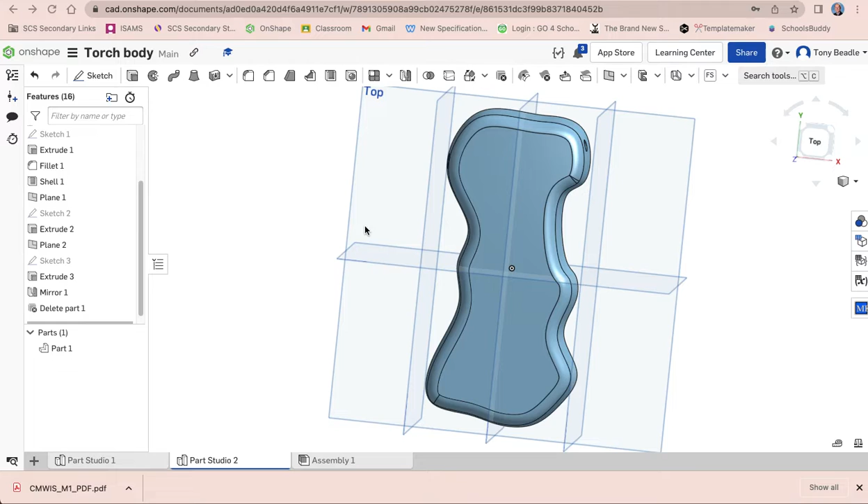Have a look at how you can make your torch body in Onshape. Here is a nice ergonomic shape that I've drawn in Onshape. It has holes for my switch and a hole for my LED, ready for me to either mill out or vacuum form once I've done the milling of the mould.

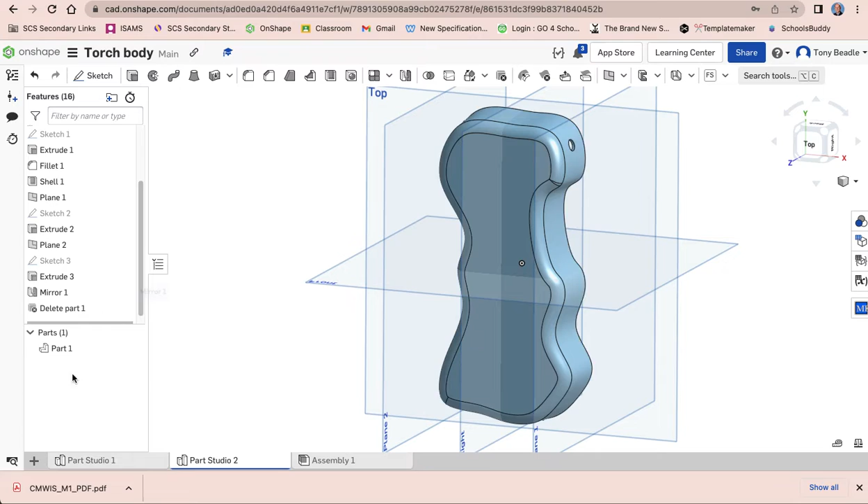Okay, so how do we start this off? Let's start off with a new Part Studio. So on the plus sign, create Part Studio. For you, it would probably be a new document.

I'm going to start by working on my top work plane. So I'm going to select that and then select New Sketch. I'm going to press N on my keyboard so I'm looking straight at it.

In order to draw out the shape correctly in the right space, I'm going to draw a construction rectangle first. So from the drop-down list, I'm going to choose my center point rectangle, not the corner rectangle, but the center point rectangle, okay, there.

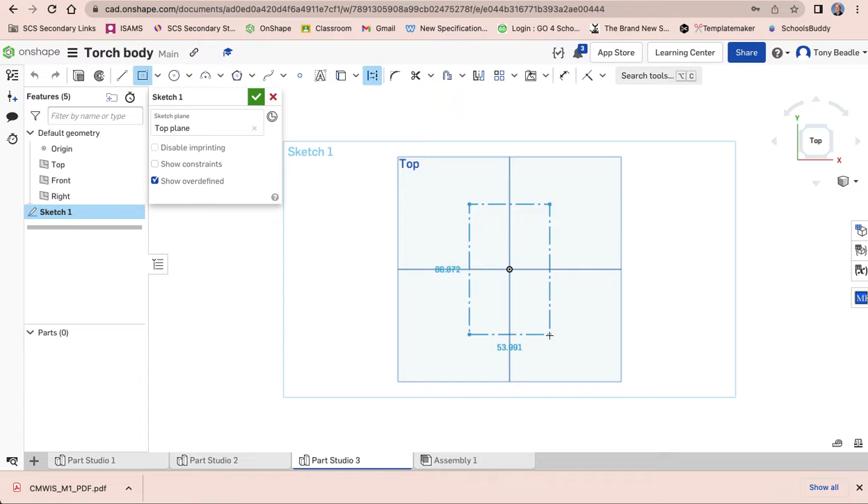And I'm also going to switch on my construction lines there. So these two are both selected. Then starting from the center, I'm going to drag out a frame. Now you can see here the lines are dotted, which is what I want. I want these as construction lines.

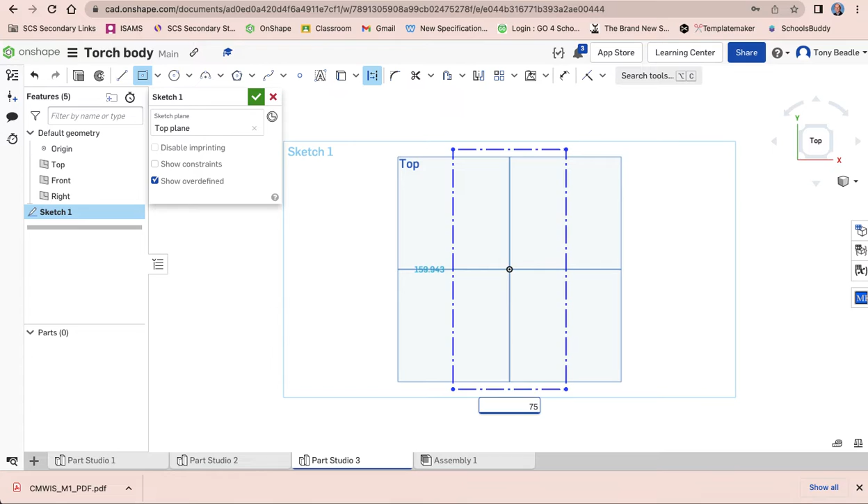Now the size of your block is 75mm by 150mm. Okay, so I've got nearly 75 by 150 there, so I'm going to click that. The white box has highlighted here. Remember, you don't click on that, you just type in the value that you want. So 75, press enter, it moves to the next box, 150, press enter, and there we have the size of the block that you're going to be using to cut your design out of.

Right, I'm going to use my spline tool for the next part. Make sure your construction line is turned off. So we're just on the spline tool. And now I know that I've got to fit it within this space.

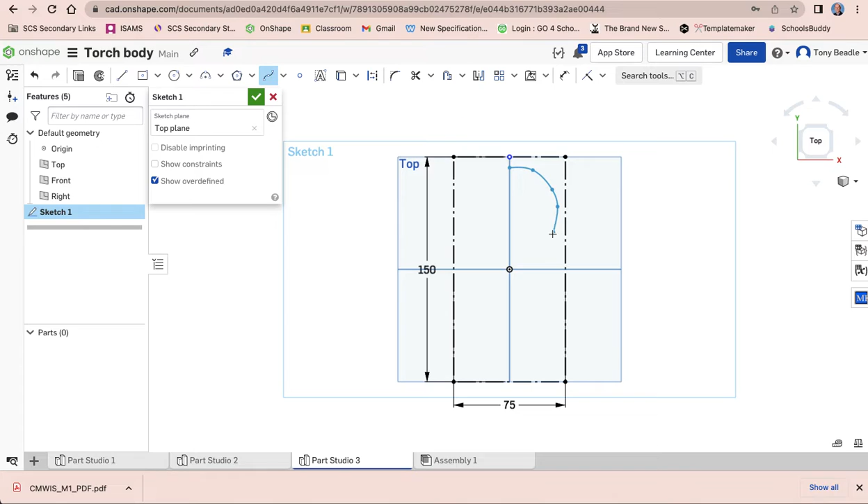Rather like we did with our drawings, we're going to draw out the shape of our torch body. Now we're just going to roughly plot points where that's going to go. Remember, you can move these afterwards, so don't worry too much if they're not quite in the right place. So I'm going to do some finger bits here, like so, you can get around to about there, that's fine. Click. Okay, now there's my shape for me.

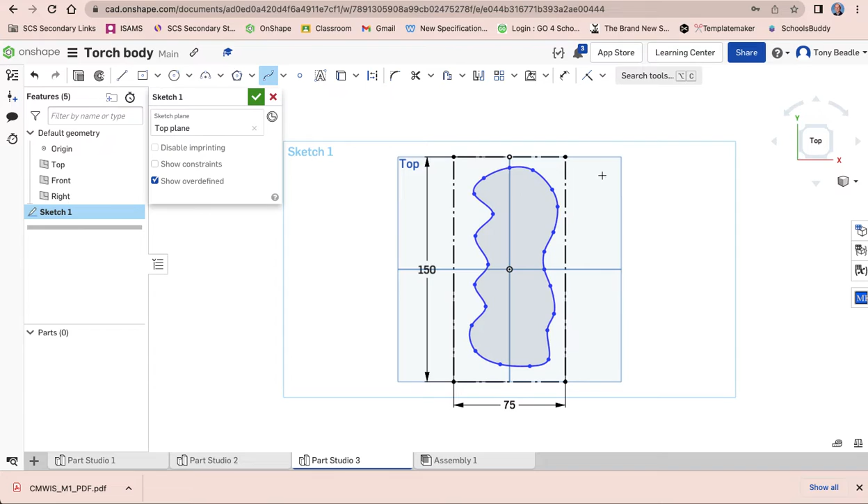Let's zoom in. So we can see we've got a reasonable shape there, but it's not quite right yet. There are a few bits that I wanted to change on it.

If I just deselect the spline tool, I can then move on and I can then grab any of these handles and I can pull them about until I get them to be the right place. So this one I might move up a little bit, this one I might move down a little bit. Yeah, that's looking a bit better.

I want a little bit more control on some parts here. So this bit here, I need another point to be able to drag this out. So if I go back to the spline tool here and I click on the drop-down list, there's a thing saying spline control point, add a spline control point. So I'm going to move to just this part here, click, and that will give me another control point there.

I'm going to deselect this tool first, and then I can actually drag this one to give some more control to my line. When I'm happy with my shape, bearing in mind that I can come back and edit this at any time, I'm then going to extrude it.

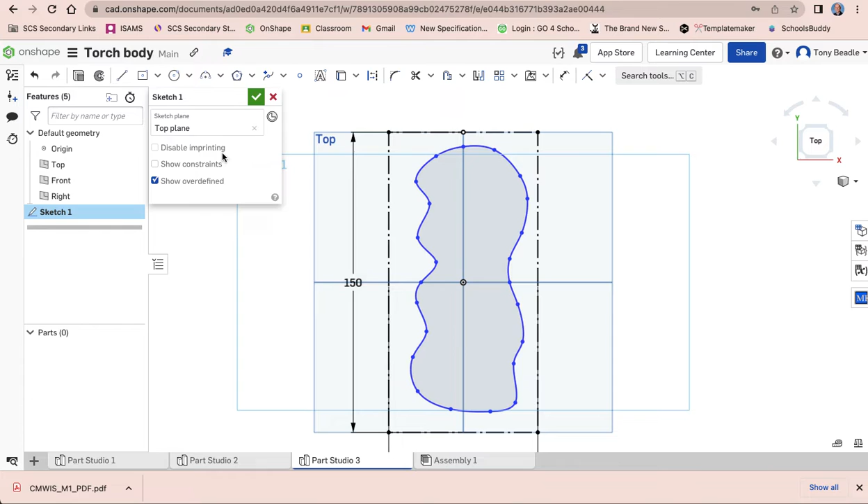So I'm going to go to my extrusion tool here, extrude. Now by default, that has raised up by 25mm. I only want it to be 20mm, so that's going to be a nice size for me.

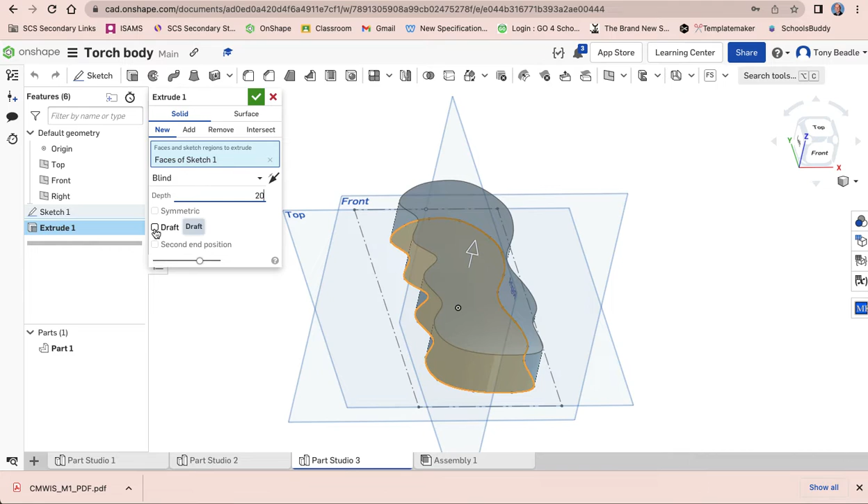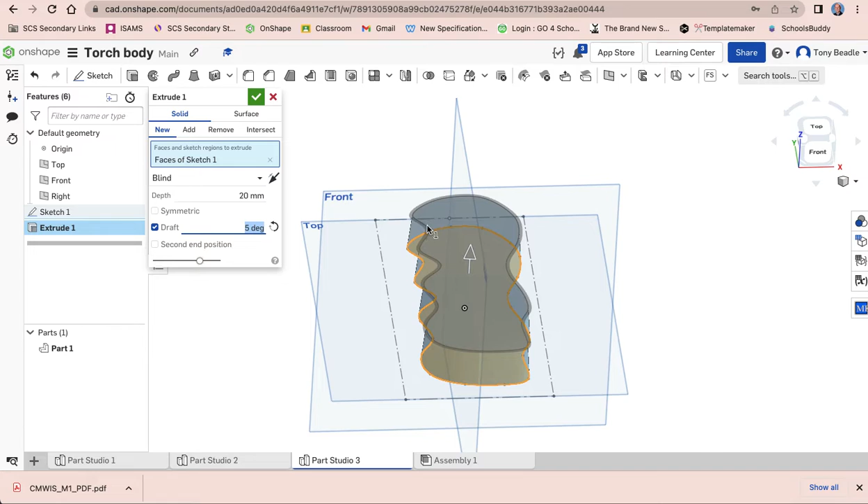And I'm also going to make sure I have a draft to it. Now the draft is what we need for vacuum forming, so that we have a taper to the side of it. By default that's tapering outwards, we want it to go inwards, so there. And instead of it being 3 degrees, it's going to be 5 degrees for us. That will bring that in. You can see where the original line was and where it's tapered into there.

Green tick that, and there I have my shape drawn out. Now, if I decide that it's not quite what I envisaged, I can go back to my sketch, open that up again, and I can move a control point if I decide that it's not quite the way I wanted it. There we go.

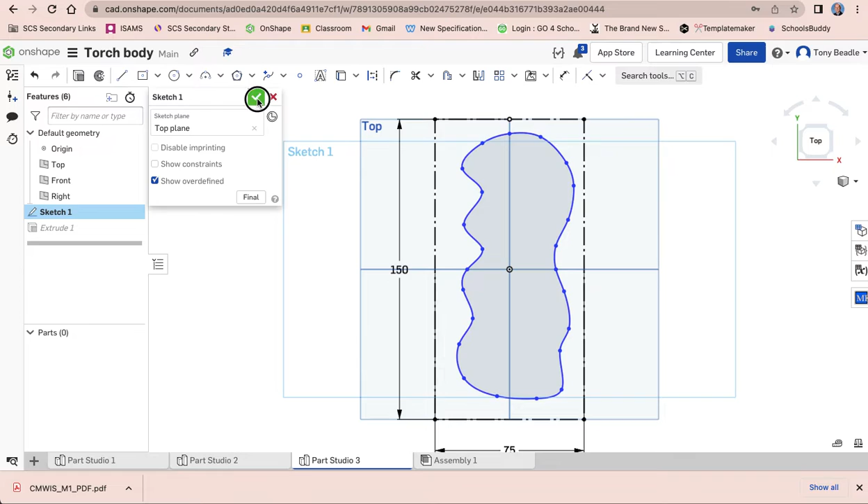And then it will redraw to the shape I want. Now, you probably also want to have a chamfer going around the edge of this. So I'm going to click on my fillet tool rather than the chamfer, and click on the top surface there. That should, if it can create it, create a fillet going around it.

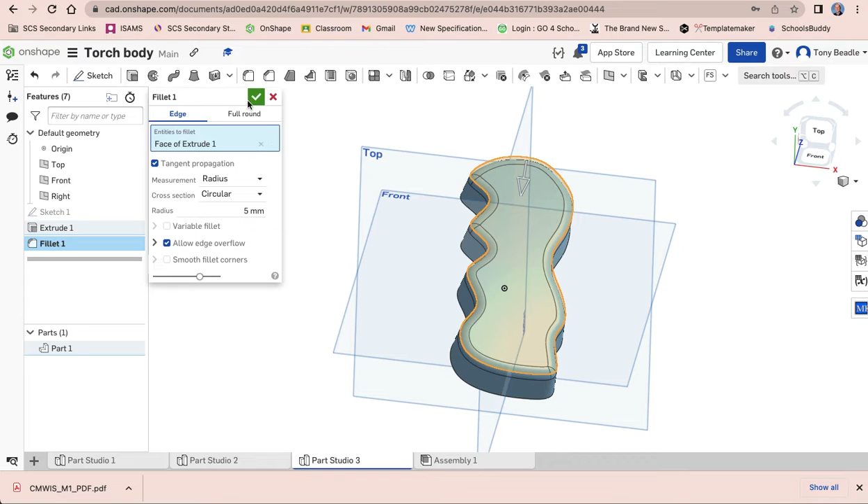There we are. Now I've got my radius at 5mm. If you find that your drawing is very complicated and it's not quite doing it, it's turning red, try reducing the radius down to a smaller value until it's worked and you get that green tick. There, I have a nice little shape there.

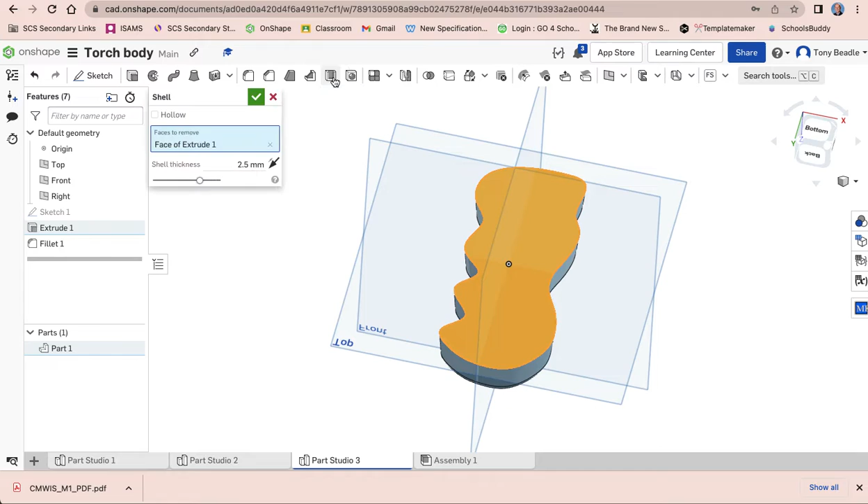Okay, now I want to shell this. So I'm going to turn it all the way around and grab the underside of it, like so. I'm going to go to my shell tool, and come in by 1 millimeter, not 2.5, because I know the acrylic, the HIPS that we're using, is 1 mil thick. That would be more realistic for our thing. There we are, there's a nice shell shape there.

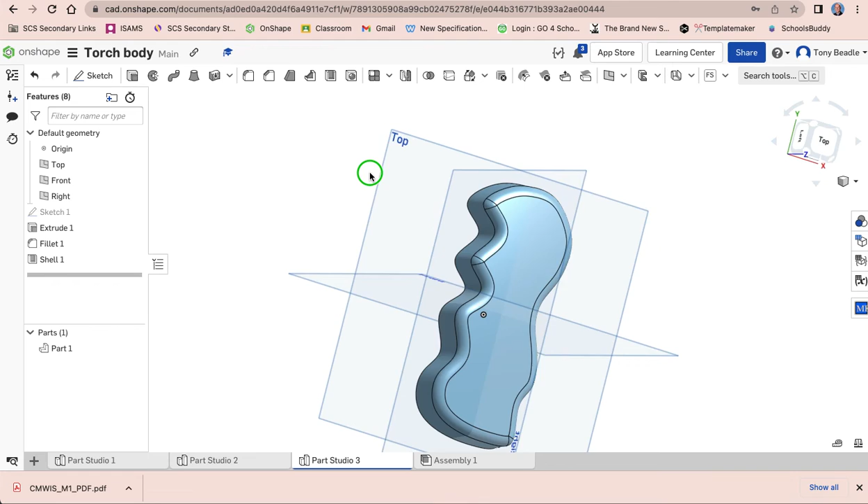Okay, that's looking a bit more like our torch body. So what about holes? Well, I might want to have on this side here my switch, and my LED I think is probably going to go about here somewhere. But your design may change. So I want to put a hole through here.

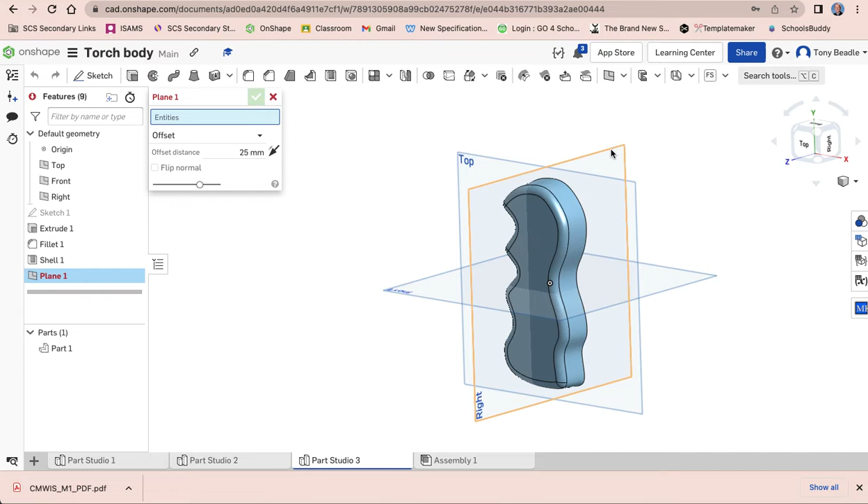Now I've got a work plane here, which is my right work plane. I'm going to grab my plane tool, and add a new work plane that's based on this. It's going to be offset from it, and the distance has to be at least outside the thickness or width of our shape there. So about there should be okay, about 36 millimeters. Green tick, and there we have that.

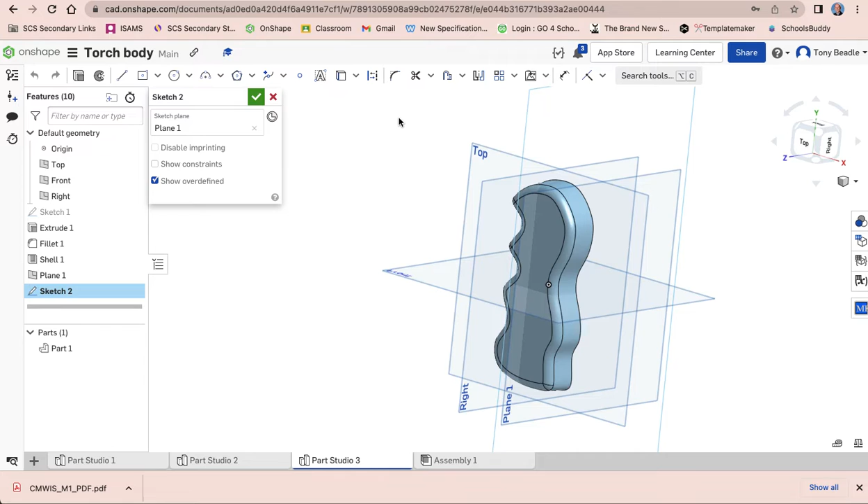And I'm going to put a sketch on this. So I'm going to click on that one, click on sketch, press N so I'm looking straight at it. And I want to put a 7mm hole about here, which is where my switch is going to go. So I'm going to take my circle drawing tool, find somewhere about there, drag out a circle, set the diameter to 7mm, click, and there's a 7mm hole.

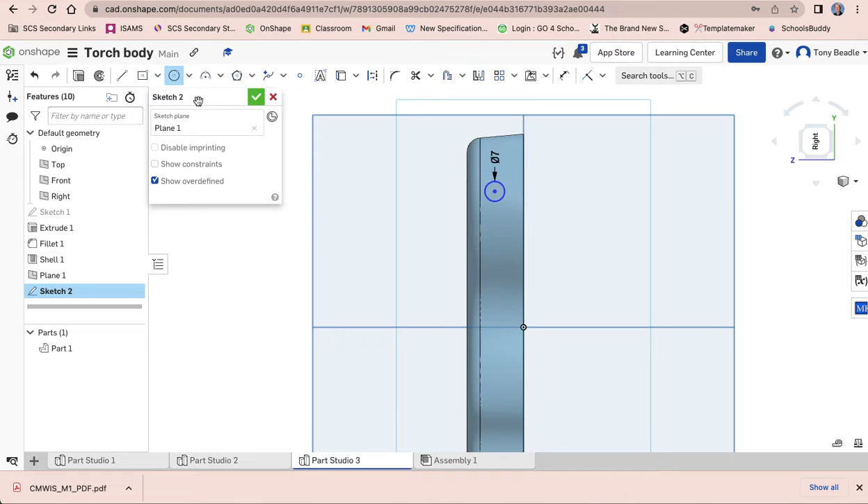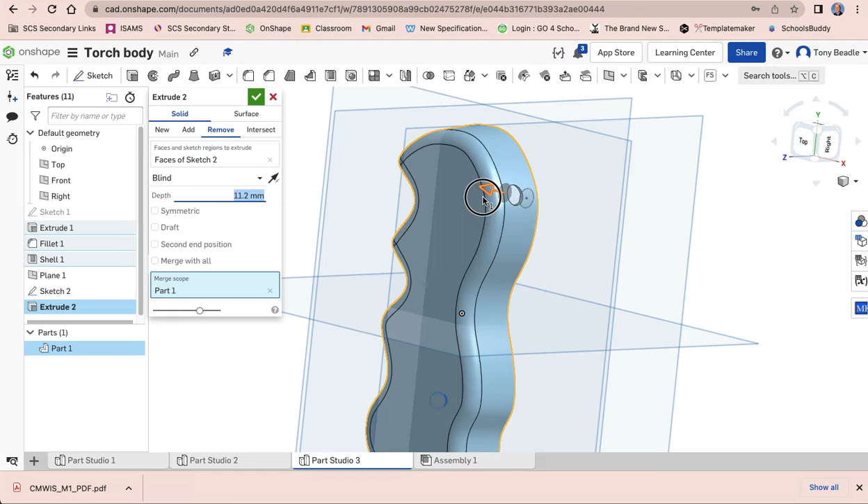I can remove it later on if I want to, but let's try and actually extrude through. I'm going to take my extrusion tool. Remember this is going to be a hole, so I'm going to remove. You can see that's already started to remove through, but we don't necessarily need it to be as deep as this - by default it's 25mm again. So let's take this back so it's just coming through the shell, so it doesn't interfere with anything else inside our shape. There, that should be enough. Okay, and now I've got a hole for my switch to go through.

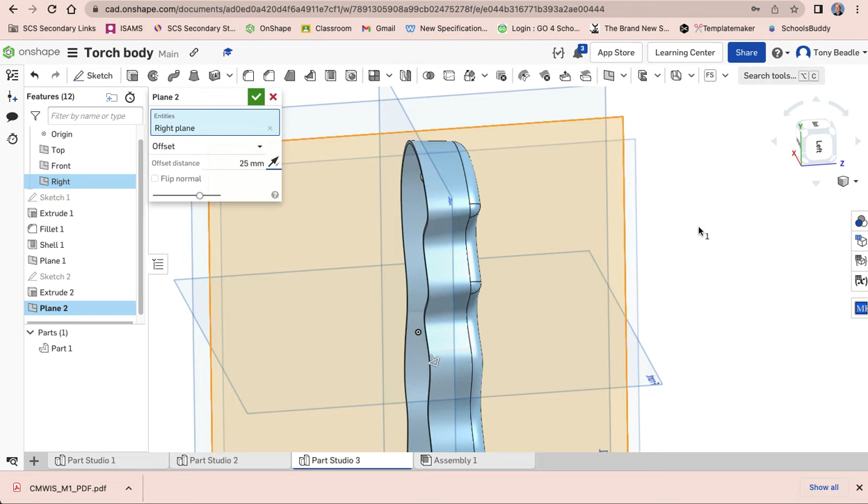Right, let's have a look on the other side here. So I want to put something for my LED here. Again I'm going to click on my right work plane, click on the plane drawing tool, create an offset to this, but this time it's going to go in the other direction. Distance has to be outside the shape. You might need to just have a look so you're looking that way on the shape so you can see it. There we are, so move a little bit closer, about there somewhere. That's fine, okay, green tick.

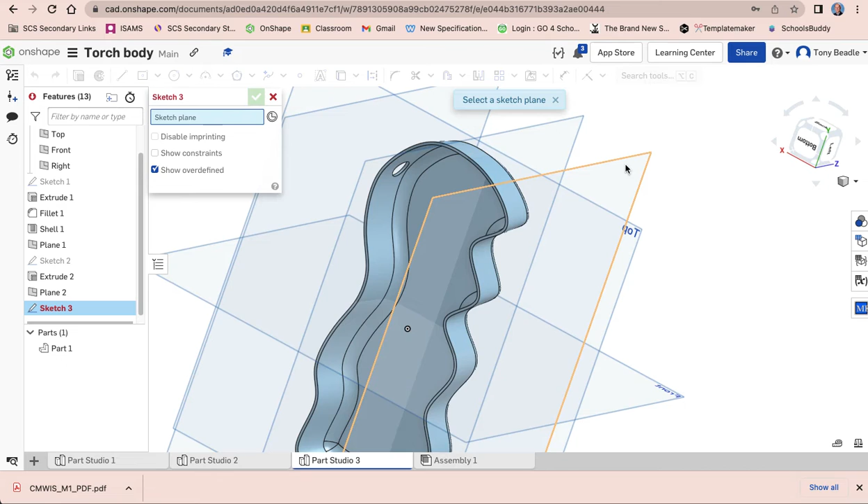So I've got a new work plane here. Click on that, click on my new sketch, so that's on that work plane. Press N so I'm looking straight at it. Take my circle drawing tool. I want my LED to come out about here, I'm going to draw a little circle here. This is going to be 5mm for my LED. Okay, there, and we'll extrude that one as well.

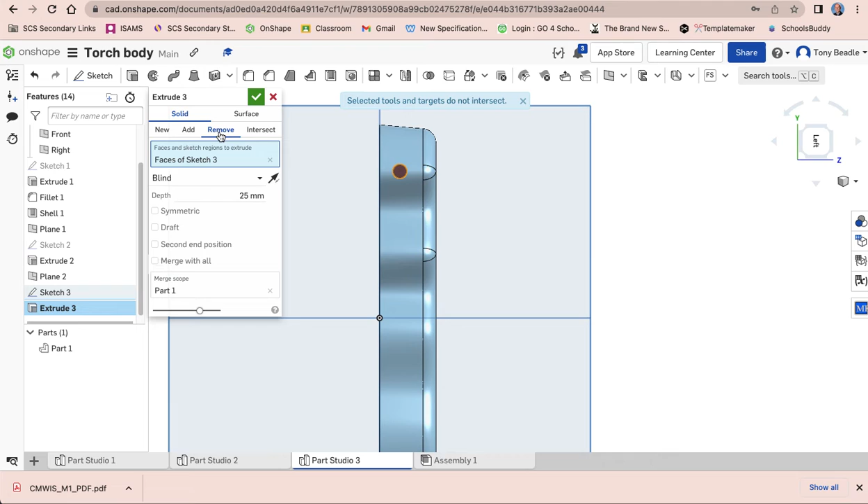And this is going to be removed. Now, so that's going the opposite direction, so I've got to go that way. And I only need it to go in about, let's say, 10mm there. And now I've got a hole for my LED there. There we go. So I've got plenty of room in my body for my battery to go in. I've got a hole for my switch, and I've got a hole for my LED.

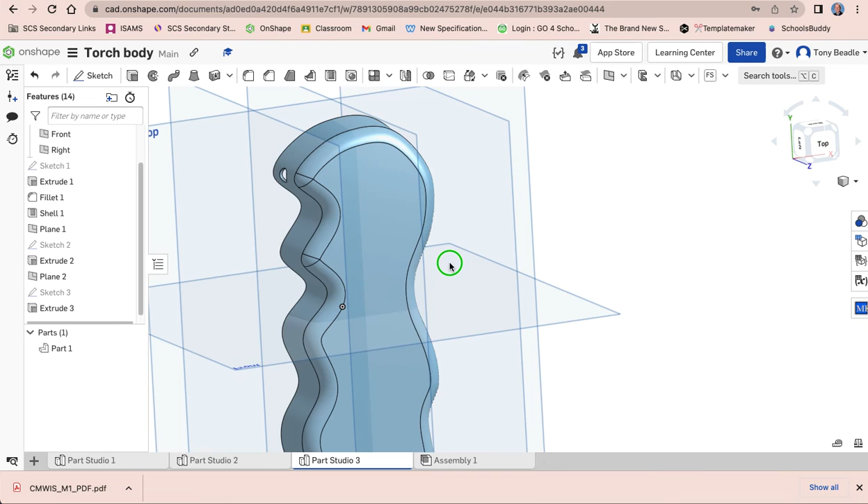I'm going to press P to hide all my work planes, zoom out so I can see what I've got there. And there I've got my torch body ready to go. Okay, looking forward to seeing yours.